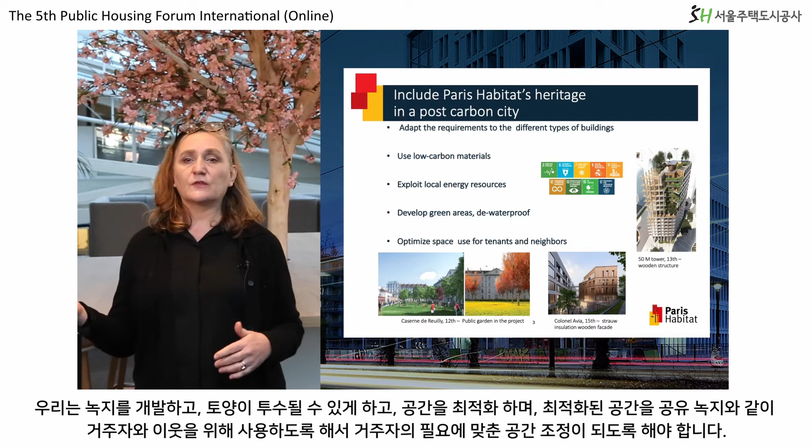We have to develop green areas, de-waterproof the soils, optimize space use for tenants and neighbors, such as sharing green areas, adapting spaces to the needs of the tenants. But doing so, we have also to take into account the diversity of heritage from the beginning of 20th century to our days and take care of the fragility of our tenants. Our investments go from global renovation to punctual actions.

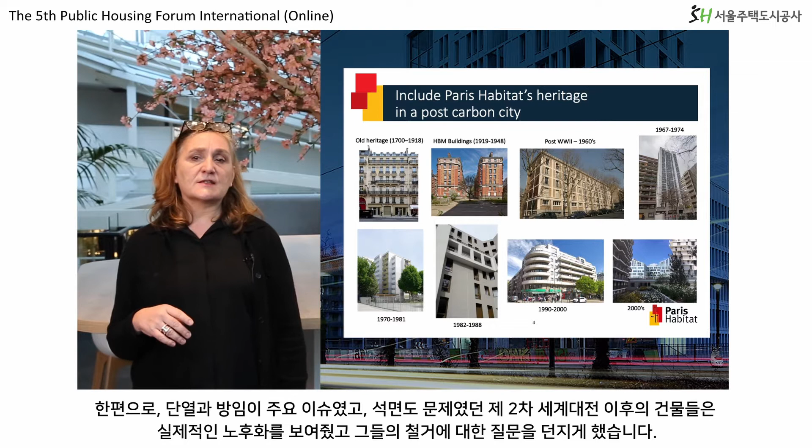For example, the HBM buildings in red bricks, which are totally obsolete in terms of habitability, but with intrinsic values, need heavy renovation in empty dwellings with thermal and acoustic insulation, ventilation improvement, plumbing, reorganization of dwellings, site projects with tenants. While the post-Second World War buildings, whose main issues are thermal insulation and acoustic, summer thermal comfort with the challenge of asbestos, point out a real obsolescence and ask the question of their demolition.

The 1960s and 1970s buildings are large urban complexes made of prefabricated panels. Their main challenges are thermal improvement, winter and summer, greening terrace roofs, asbestos, but it is also how to improve attractiveness and service qualities, demineralize the external surfaces, improve the rainwater management and collection, and at last, the last 20 years housing developments meet already sustainable development and energy efficiency standards. So only sustainable maintenance is needed to maintain the quality of the dwellings.

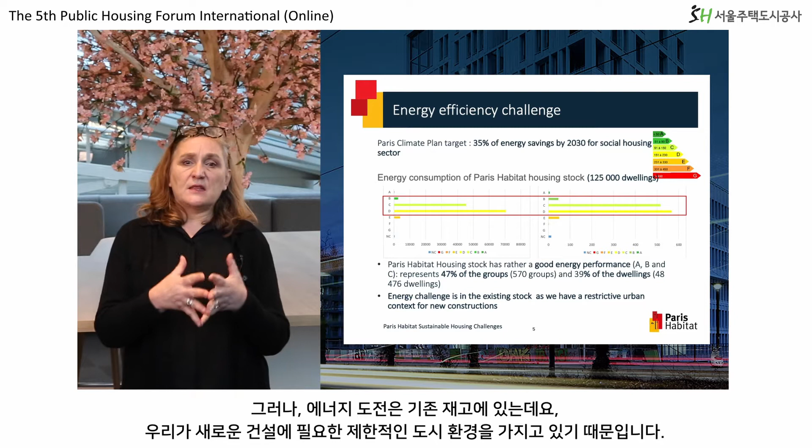In terms of energy efficiency, the energy consumption of Paris Habitat housing stock, we talk about 125,000 dwellings, is, as you can see on the schedule, half of the groups are labeled ABC, and the other half is in label D, but closer to 150. That is not so much. However, energy challenge is in the existing stock, as we have a restrictive urban context for new constructions, and as we have a diverse ancient heritage mostly built before 1948.

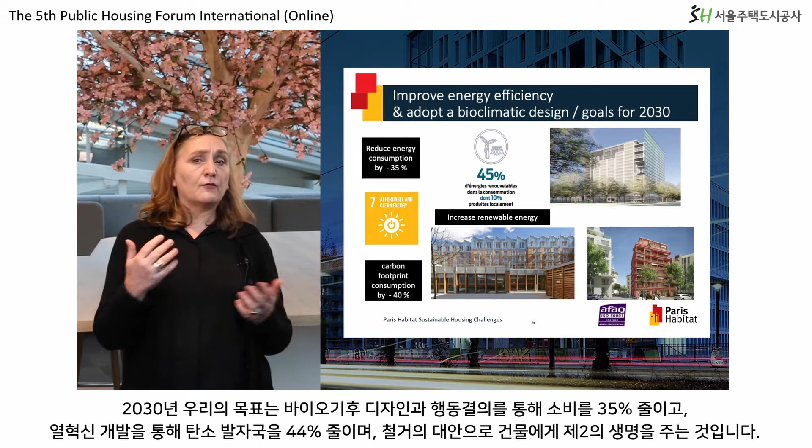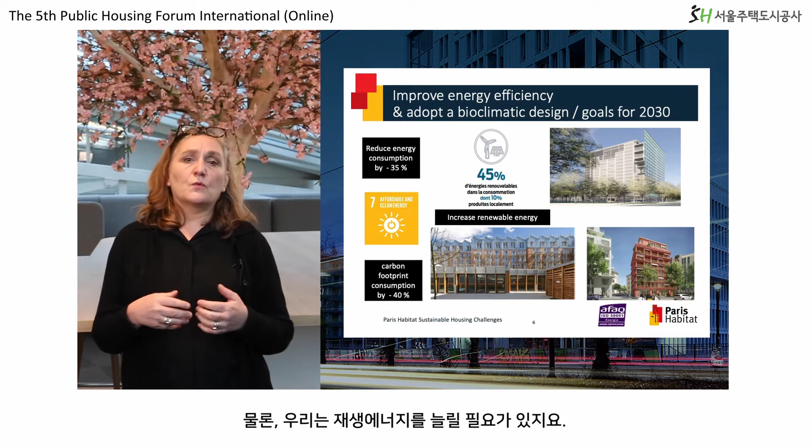What kind of actions? Based on the SDGs, our actions tend to integrate climate plan goals into Paris Habitat's energy policy, and our goals for 2030 are reduce consumption by 35% with bioclimatic designs and actions of commissioning, for example, reduce carbon footprint by 40% by developing thermal renovation, and by giving second life to the buildings as an alternative to the demolition. And of course, we need to increase renewable energy.

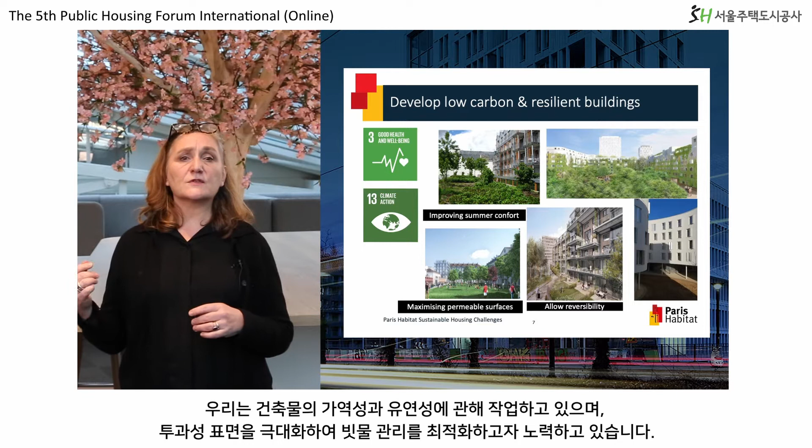To develop low carbon, we work on the resilience of buildings and fresh areas, adaptation and mitigation to climate change. We work on the summer comfort, which is right now a real concern for our tenants. We work on the reversibility and flexibility of the building at the conception and try to optimize rainwater management by maximizing permeable surfaces, as you can see on the pictures.

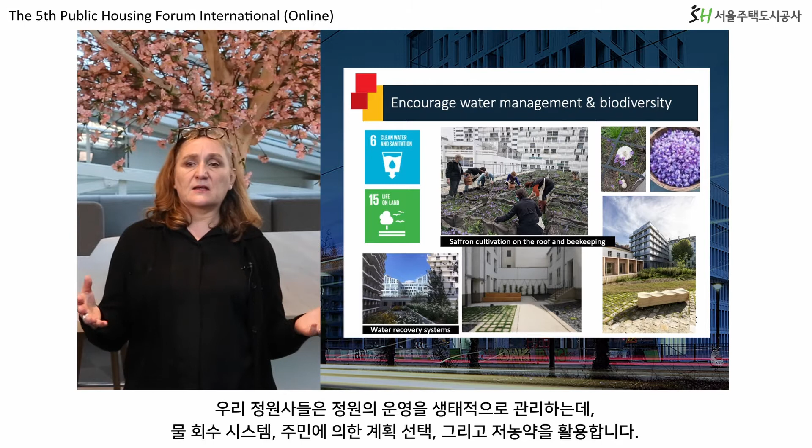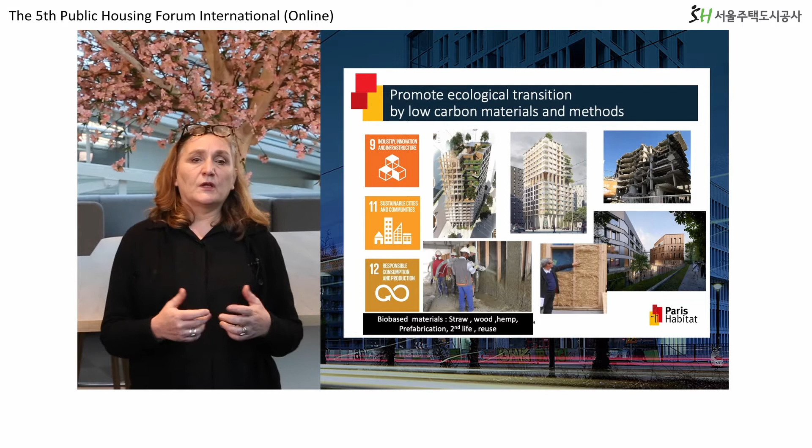We try to improve grey energy by the choice of materials. We limit the need to excavate the land and develop it as close as possible to the operation according to the quality of the land. And we maximize the use of materials that are little or not transformed or biosourced or derived from reuse or recycling and coming from local sources. We adopt construction methods that minimize the use of water in dry periods.

To illustrate some of those commitments and actions, I will give the voice to my colleagues, Geneviève and Juliette, who will focus on two innovative projects in accordance to two of the SDGs, affordable and clean energy, and responsible consumption and production.

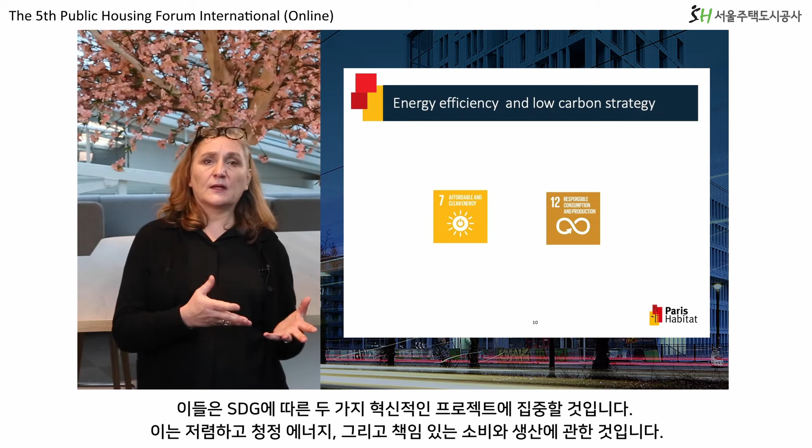Good morning, my name is Geneviève Dito. I work at Paris Habitat in the Sustainable Housing Department on climate and energy efficiency. And today I would like to present the Beaubourg project, where some heat was recovered from the tube in order to heat up the building above.

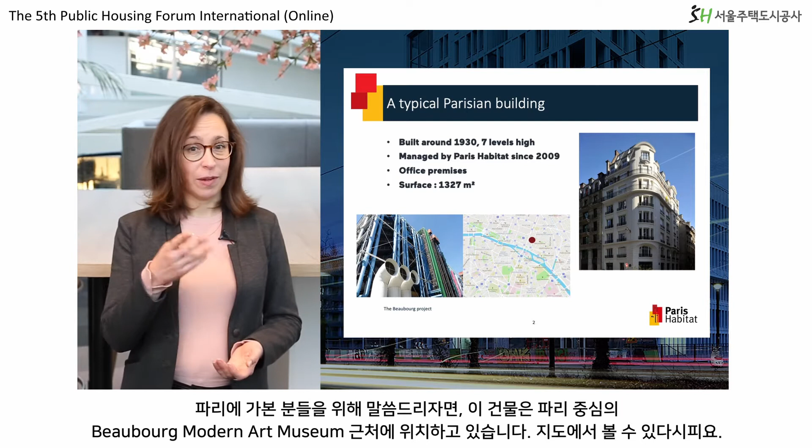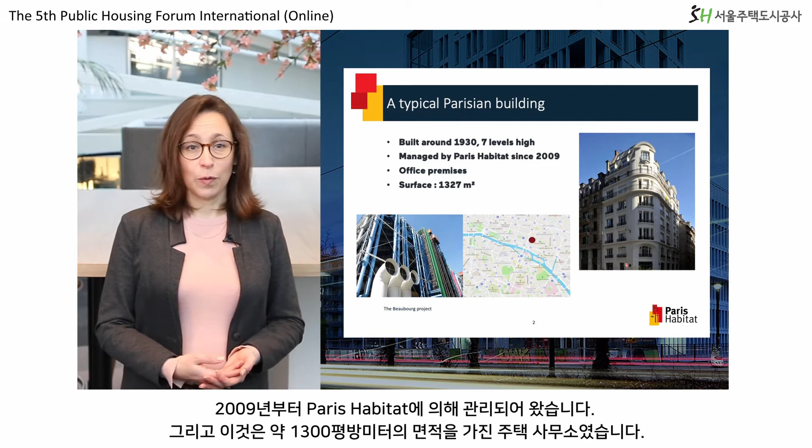This building is a typical Parisian building, as you can see on the photo. For those of you who've been to Paris, it's located close to the Beaubourg Modern Art Museum in the center of Paris, as you can see on the map. This building was built around 1930. It's 7 levels high. It has been managed by Paris Habitat since 2009, and it was housing offices on a surface of about 1,300 square meters.

So an extensive renovation was carried out for this building in order to transform it into 20 flats and a shop on the ground floor. As you can see, we went back to the bare structure. One photo shows the floor open before it's been replaced, and the facade all opened up before the windows were put back.

And this work was an opportunity to improve the energy efficiency of the building in order to reduce the heating need. Thus, walls and roof were insulated, all the windows were replaced, a new ventilation system was installed, and the space heating and hot water production was renovated.

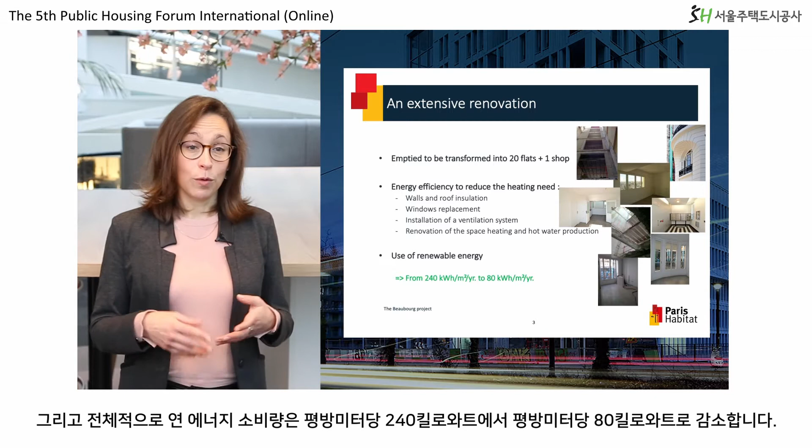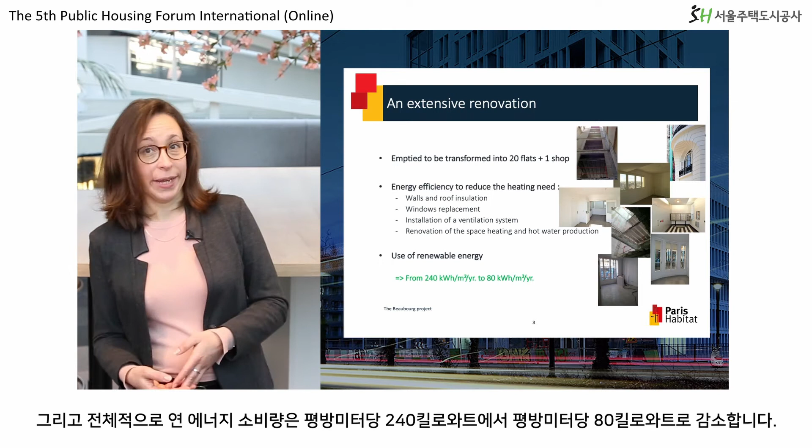And once we reduced the heating need, it's important to go further and try to use some renewable energy. So that was the aim for this project. And altogether, the energy consumption is reduced from 240 kWh per square meter per year to 80 kWh per square meter per year. So which renewable energy was used in this building?

When my colleagues in charge of the project went to visit the building early on, they discovered that an underground staircase directly connects the building to the tube tunnel, as you can see on the cross section. And also the photo shows that at the bottom of the stairs there is a door, and the door leads to the tube track. So the tube is going past just behind this door.

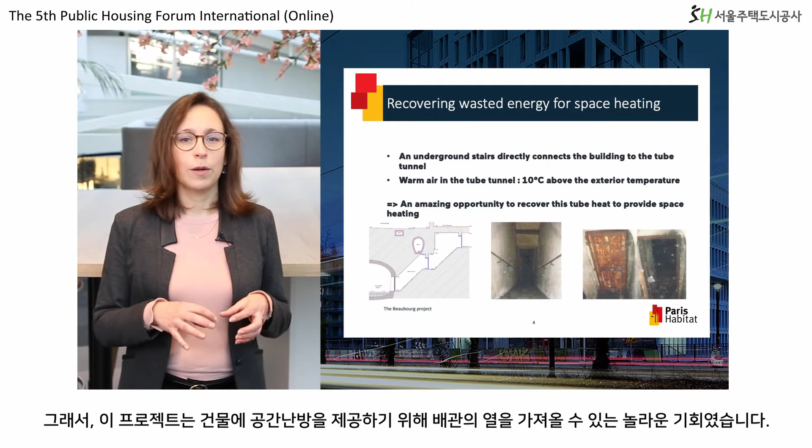The temperature of the air in this tube tunnel was also measured, and we discovered that it was 10 degrees above the exterior temperature, which is a great source of energy. So this project was an amazing opportunity to recover the tube heat in order to provide space heating for the building. To set up this innovative project, it was necessary to sign a partnership between Paris Habitat and the RATP.

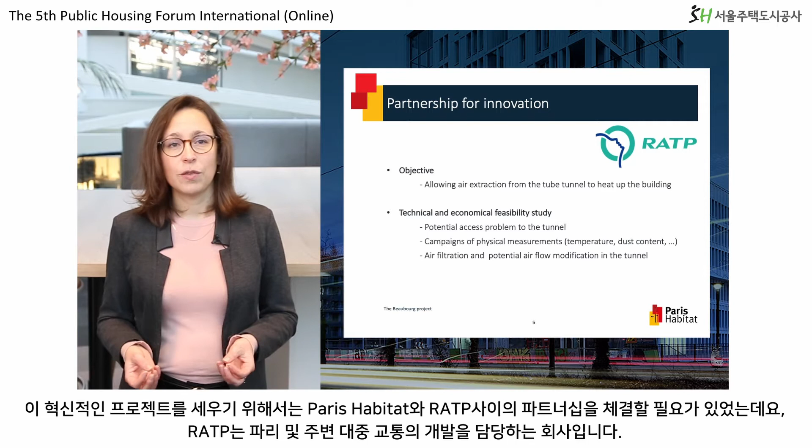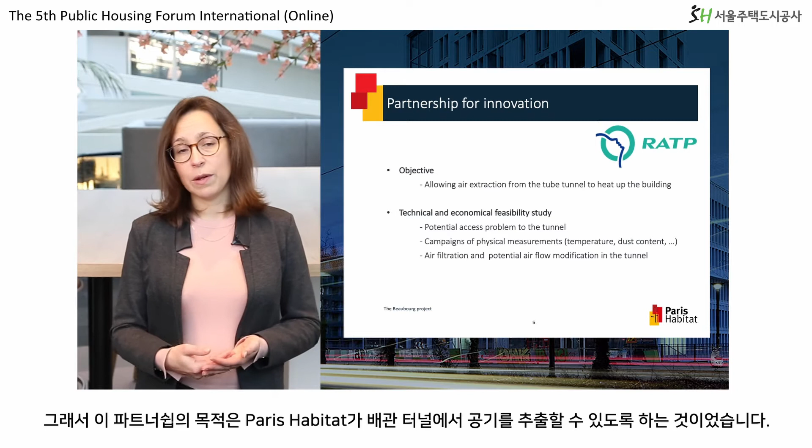The RATP is a company in charge of the exploitation of the public transport in Paris and around. So the objective of this partnership was to allow Paris Habitat to extract the air from the tube tunnel. And also some studies were performed in order to assess the technical and economical feasibility of the project.

For example, to assess the access to the tube tunnel, to measure the temperature and the dust content of the air, to select an air filtration system because the dust content in the tube is quite high, and also to evaluate the airflow modification in the tunnel when the tube goes past, because it could create an overpressure.

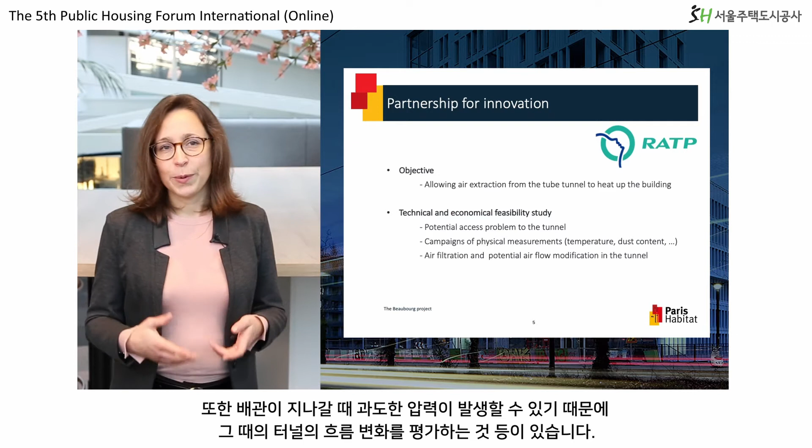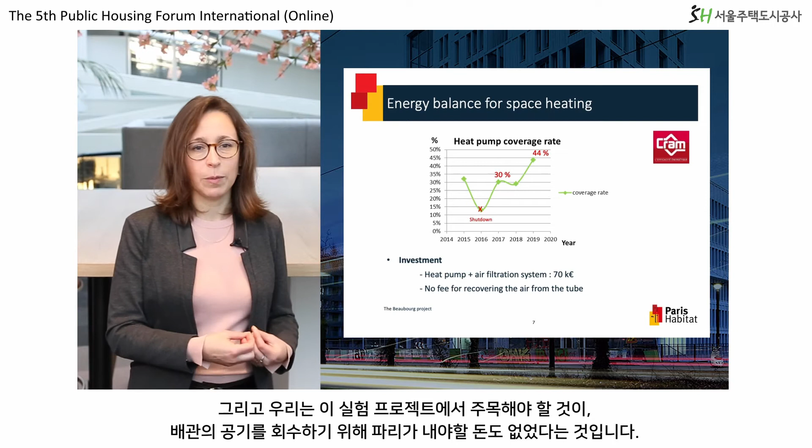When we consider the energy balance for the space heating for this building, we can see that the heat pump covers from 30 to more than 40% of the global heat need for the space heating, which is a very, very interesting and encouraging result. So the investment for this heat pump and the air filtration system was about 70,000 euros. And we have to notice that for this experimental project, there was no fee charged to Paris Habitat to recover the air from the tube.

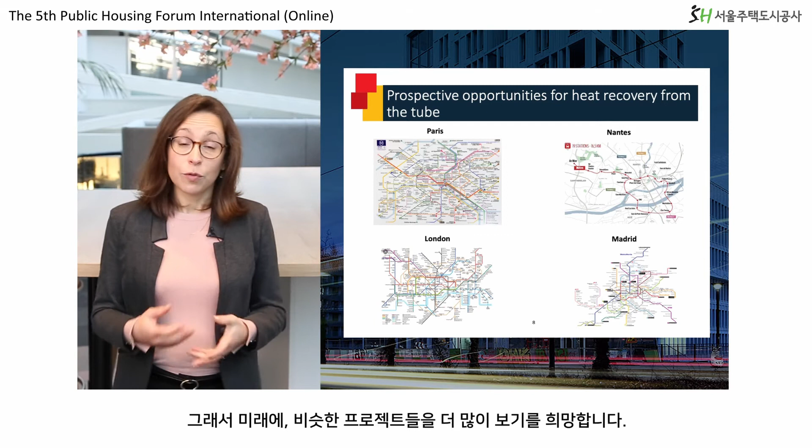So what's the future? Several cities are currently trying to find more opportunities in order to recover the heat from the tube. In Paris, for example, with the extensions of some existing lines and also the creation of some new lines. In Nantes also, in France, in London, and in Madrid. Madrid is also trying to recover some heat from the tube when it brakes. So in the future, we hope to see more similar projects.

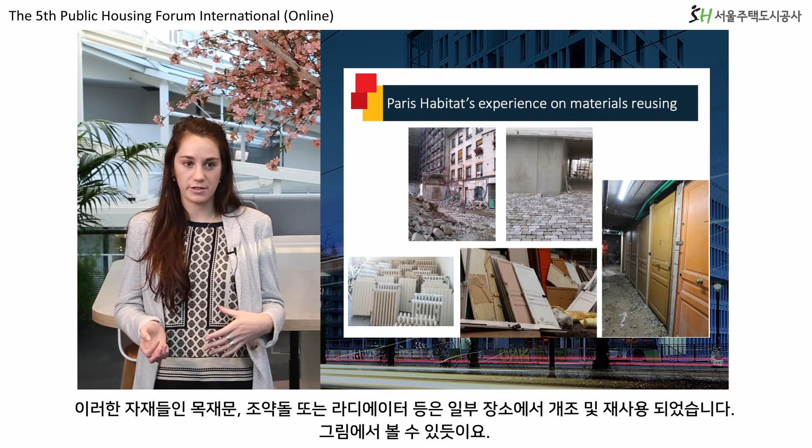On the Caserne de Reuilly operation, we've been experimenting material reusing at a larger scale. In these operations, we have about 39,000 square meters of renovation and new building. So we have family-specific dwellings, commercial premises, and nursery.

We reuse different types of materials: cobblestone, radiators, luminaires, slates that have been crushed for pathways, but also panels that have been transformed to make furniture for student dwellings, and also wooden cupboards that have been reused on sites. All these reused materials make this operation an emblematic site in terms of circularity.

So at Paris Habitat, our goal is to integrate a circular methodology in our asset management and increase the part of reused materials in our operations. In this framework, we joined a European project on circularity and material reusing. So CHARM project means Circular Housing Asset Renovation Management.

It's a project from Interreg Northwest Europe program, financed by the European Regional Development Fund since 2018 and until 2022. It's a project led by University of Delft in Holland, and it gathers 4 social housing companies, including Paris Habitat. So we have partners from England, Holland, Belgium, and France, and other partners on research, communication, such as the European Federation for Living, but also associated partners that have a key role in dissemination and feedback.

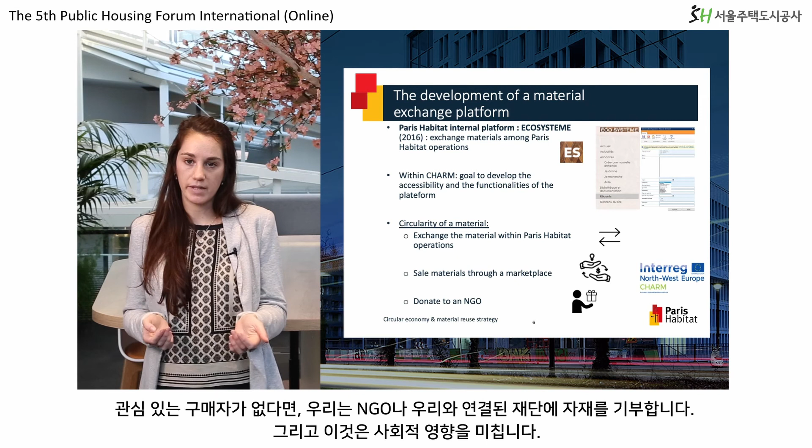How it will work: to start on the platform, we explore the possibility to exchange the material within Paris Habitat operations. If it's not possible, we send the material to a marketplace who's going to sell it. If there is no interested buyer, we donate the material to an NGO or to a foundation of our network which has a social impact.

Another mission within CHARM project is to experiment material reusing on a few demonstration sites. So we chose within Paris Habitat housing stock different types of buildings, such as buildings from the beginning of the 20th century, typical worker buildings, and buildings from the 60s. We have 5 operations, from light renovation to deep renovation, which involve demolition and new construction, and also transformation operations. We also have a sample of dwellings that we refurbish before rental, so after a tenant departure.

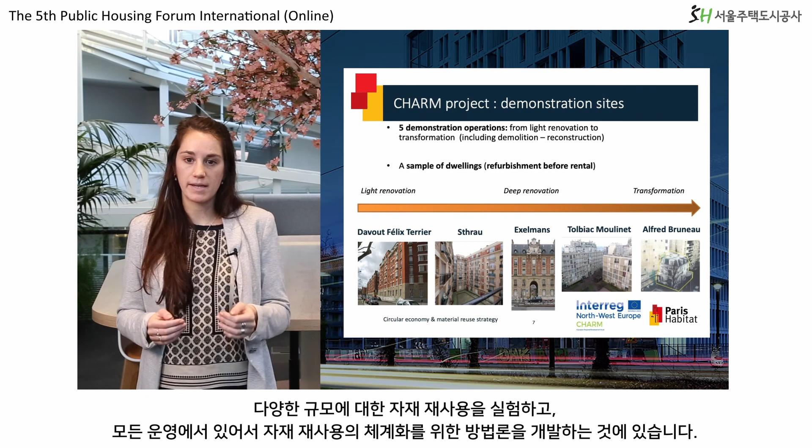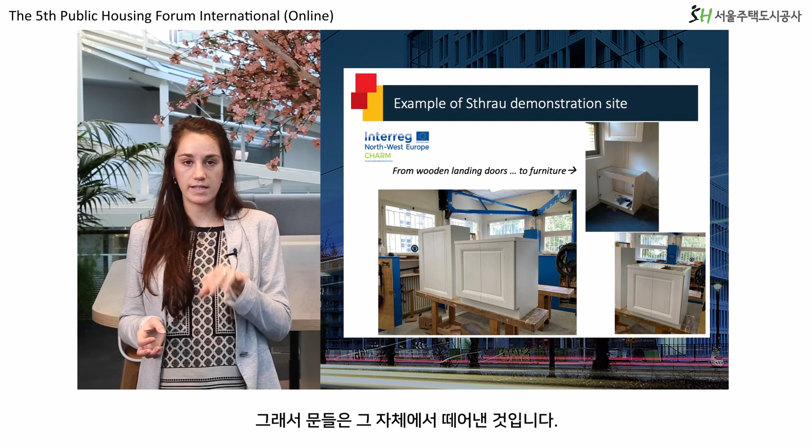On the same site, we have been reusing PVC windows to make a glass partition wall. This is what we're doing on one of our sites, reusing and transforming, but we also experiment reusing, refurbishing on site, and sending material to be reused on other sites.